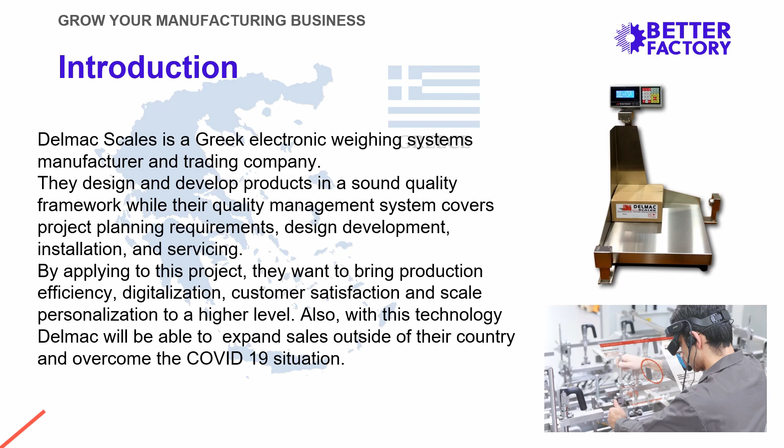By applying for this project, they want to bring production efficiency, digitalization, customer satisfaction and scale personalization to a higher level. The main ideas behind this project are customization, to automate and digitize the customization process of the scales.

Customization web tools with AR where customers can choose how they want their scales to be in advance. Lean production and voice control, to apply lean methodology.

This would include AGVs to transport scale parts and a voice control AI-based system that will guide employees through the production process. Maintenance, to use AR in order to provide immersive remote customer support. Waste reduction, to use 3D printed parts and recycled plastic from local waste.

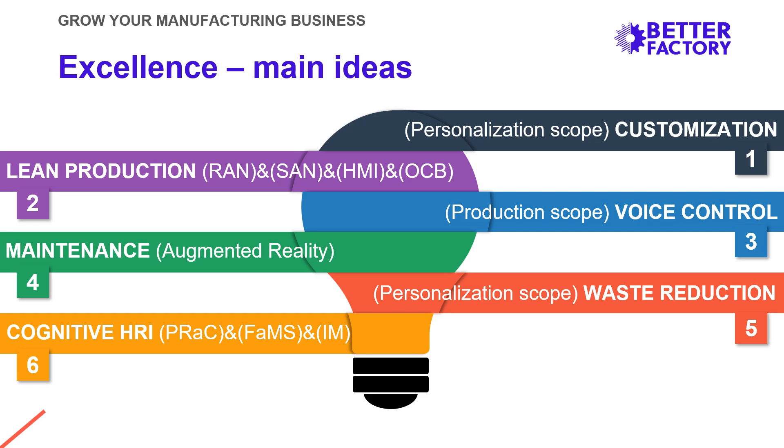Cognitive HRI, to improve the posture of production's employees.

Currently, each purchase at DELMAC starts with a negotiation with the customers to understand what their specific needs are. The customer needs are then presented to DELMAC technicians and together they work on the design of the weighing equipment to be manufactured.

Our first improvement will include an advanced web platform in which the customer can choose from different possibilities offered by DELMAC to customize the scale. This would result in a preview of their desired scale, which could as well be visualized in the customer's environment using augmented reality.

When the final weighing equipment's appearance and functionality are defined, we will implement lean, agile production methodology in order to create an optimal production process. However, the desire of agile production has led to the flexibility and complexity of production lines.

Agile manufacturing concept enables organizations to quickly react to diversified market changes and customer needs while minimizing the modification to the company's main structure. Agile manufacturing strongly depends on IT devices.

For creating a continuous flow of material, we will use AGVs that need to connect smoothly working positions by efficiently transferring material between them. For that movement, we will use SAN and RAN modules, and for visualization, OPIL HMI module.

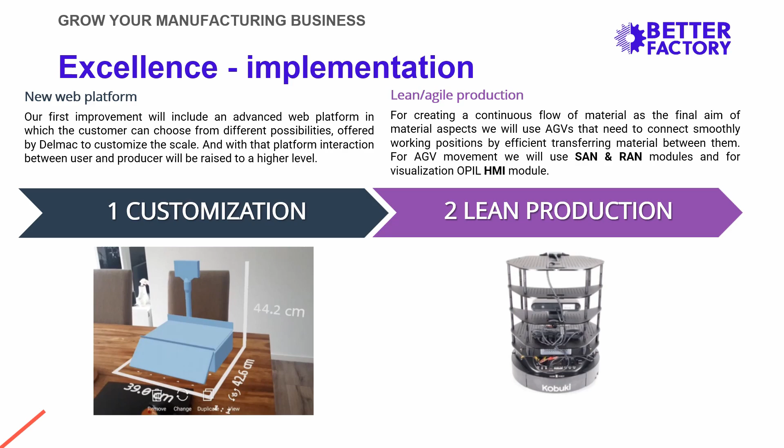The implementation and utilization of a pull mechanism will help prevent time being spent on overproduction. The 5S Lean tool, which stands for sort, straighten, shine, standardize and sustain, will enable removing of unnecessary steps and reducing equipment setup times in production processes.

Scale production will be done by specialized technicians with additional improvements like the application of voice control, AI-based solutions, and light ERP software. Each employee will have a headset that will guide him through the production process. This will create a fully planned production of scales.

During the project, the technology provider will continue to develop a voice control module which started with the L4MS project, that will be adapted to scale production processes, as well as the ERP that will be used for work order creation and execution monitoring. This AI-based voice control system will enable flexibility in working processes based on production customization requirements.

It will allow agile and much better control in production processes and high efficiency of employees. This module can be easily adapted to various other systems, especially warehousing, and by adding it to the better factory ecosystem, it will surely bring additional value to the project.

Final weighing equipment will be sent to the end customer. As already pointed out, production equipment is very advanced and must be integrated into the customer's production process. That is something DELMAC's technicians must do inside the customer's production facility. All installations and further maintenance require DELMAC's employees visiting the customer site.

A large improvement could be the application of AR technology. This technology could bring the following benefits: the customers can preview the scale in their environment before it is produced.

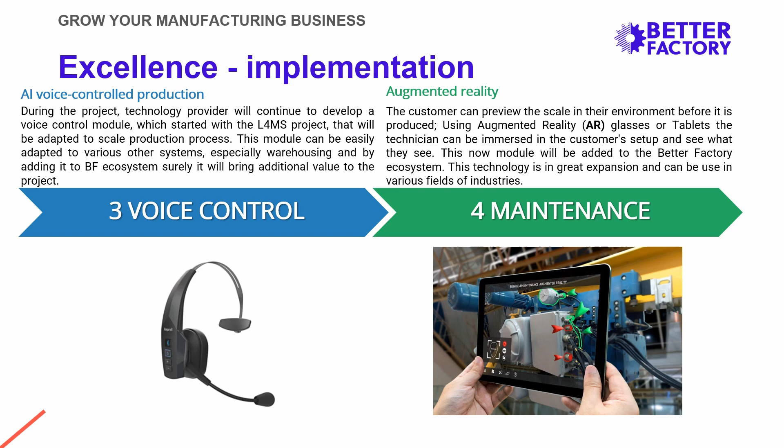Currently, DELMAC Scales produces all its products in its factory in Athens. This way, DELMAC not only ensures the quality of production and materials, but also generates as little waste as possible.

However, there is some plastic residue generated in the production that could be reused to make the body of simpler scale models. The artist will create a new design for a scale using production and a local plastic waste recycler to raise awareness about the amount of plastic that is discarded by local communities, and how it can still be valuable and should be reincorporated in the production chain.

Another improvement that will be implemented is the optimal employee ergonomic position. Because DELMAC produces different types of scales, the employee can be in different and hard positions. In order to determine his position, fatigue and movement, we will use RGB cameras and smart wristbands.

Output from those devices will be input to a pose recognition and correction and fatigue monitoring system that will give recommendations on how to improve employee conditions and get better performance. On the other side, their output will be input to an intervention manager who will give the best solution for the worker to interact with the workplace.

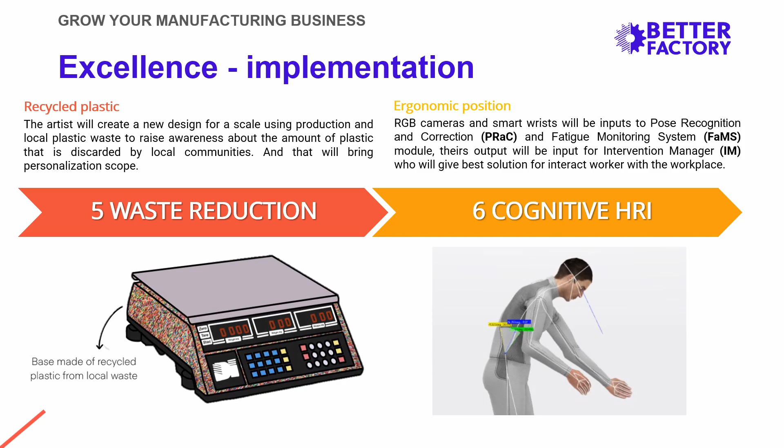The automation solution with great business potential concerns customer support and maintenance service. The sales network is reaching only Greece today, so all customer services are performed in person by a DELMAC representative. Immersive remote customer support will make international sales possible and customer support travel free.

Customer service, while not coming from production sales directly, represents a great share of DELMAC sales. Another valuable benefit of this solution is that it protects the business from unexpected risks like the corona pandemic, where this type of service had to stop due to travel restrictions.

Using advanced technologies through light ERP software and agile lean manufacturing will decrease production costs. The opportunity for ordering upgrade is presented through a customization web tool, and even visualization of the customized model in their own location using augmented reality.

In this way, there are significant time savings in the order-to-cash process, which is very significant for financial liquidity. The proposed solutions also increase employee productivity, plus they cut some expenses like travel, marketing material, paper, and other office materials.

Production scrap is essentially wasted money. Using 3D printed parts and recycled plastic from local waste is a clear cost-cutting methodology, opening personalization perspectives in production.

The idea is to improve the posture of the production worker, which is often improper due to different production stages and different types of scales. By measuring and analyzing the production worker's posture using RGB cameras and smart wrist devices, we will determine their position, fatigue, and movement, and provide recommendations for optimal ergonomic posture.

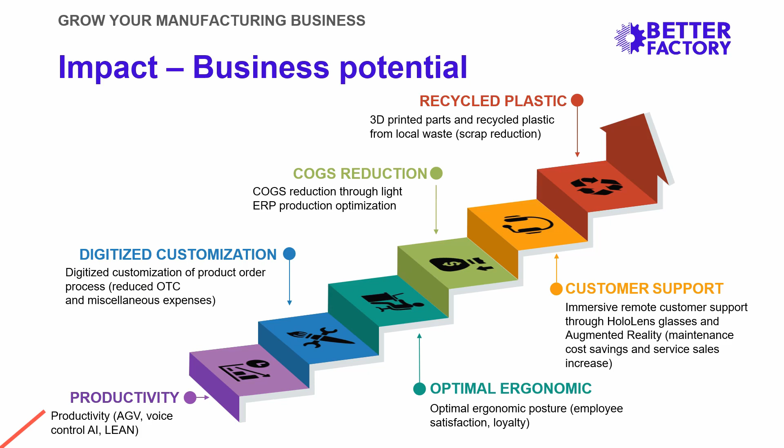There is a rising trend of customers worldwide who are comparing, evaluating, and making purchase decisions in relation to product sustainability and environmental friendliness. For DELMAC, this project and the use of the RAMP platform offers the ability to expand their customer base outside of Greece, as well as enhance their production using new technologies while providing online services to customers by AR and IoT that Better Factory provides.

Also, the use of AGVs and voice control systems will bring lean principles into the facility.

For Sara Alvarez, team artist, this project is a great way to explore the application of 3D modeling in augmented reality, creating immersive experiences. Besides, she's up to the challenge of rethinking how industrial scales could look and feel, since their design is usually quite neutral and functional.

Sara will use RAMP and Better Factory tools to grow as a design researcher and creative technologist, expanding her portfolio and practicing the application of sustainable design.

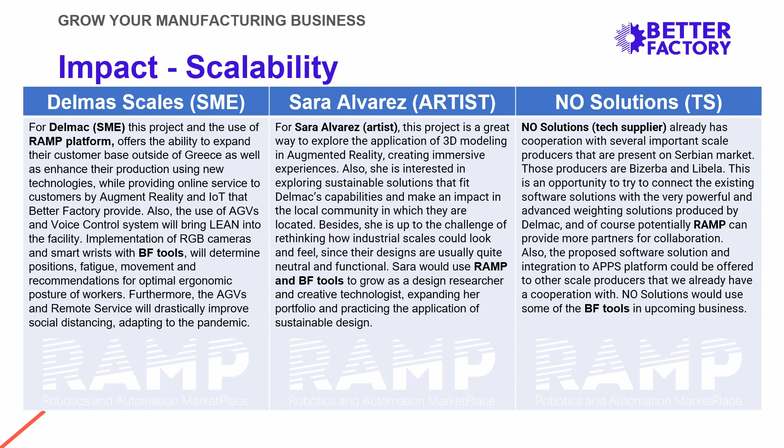NO Solutions, as a tech supplier, already has cooperation with several important scale producers present on the Serbian market, such as Bizerba and Libela. This is an opportunity for them to connect their existing software solution with the very powerful and advanced weighing solution produced by DELMAC, and of course RAMP will provide more partners for collaboration.

The experiment will have several impacts on sustainability of the project: reducing material waste with the factory digital twin simulation and digitalization of the customization phase, and ecology impact by using AR and remote maintenance, which will reduce the need for driving and CO2 emissions.

Work conditions will be improved from an ergonomic and safety point of view. There will be social and environmental impact by collaborating with the local plastic waste recycling community in Athens, and reduction of environmental impact by producing parts in-house.

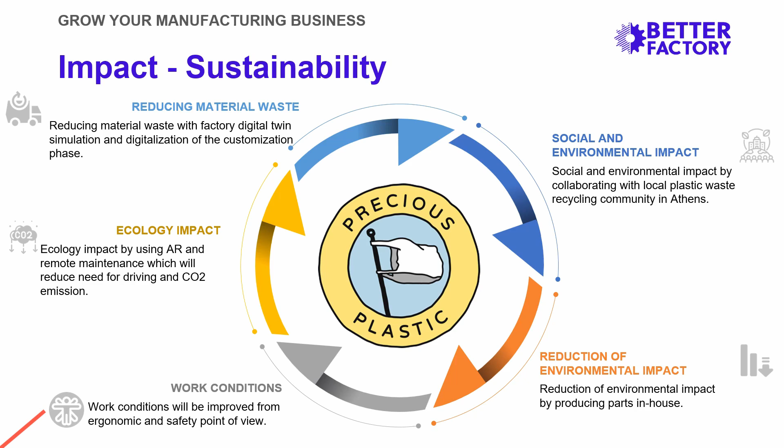Our experiment team consists of experienced professionals ready to work together on changing the business perspective of all 3 sites in the consortium. We have identified several risks that can affect our experiment.

The only risk with high possibility of being actualized is an unfortunate and unforeseen event such as the COVID-19 pandemic. If Greece locks down, we will have to find an appropriate substitute for laboratory testing and implementation until it becomes possible to set it up in production.

There are 2 risks with medium possibility of materialization: low performance of using RAMP and its application, which will be solved by regular meetings with Better Factory mentors and the supporting team, and preliminary analysis of current software compatibility and integration with different databases; and lack of space at the SME to include the proposed AGV solution production restructuring.

Maximum dimension for the AGV will be included as a requirement in this development or equipment procurement process. And the 3 risks with minimal chance of happening are non-performance of partners or delay in milestones and deliverables.

Risk mitigation involves monitoring the progress in all areas of the project and providing prompt feedback to the other partners in the consortium. Regular checks and meetings will be held to help ensure partners are clear on the progress, along with constant communication with Better Factory mentors.

Another risk is burdening the budget more than expected. The project team will implement control methods that can detect possible issues with the project budget concerning potential deviation in expenditure. For loss of key people or a partner leaving the project, partners' expectations will be continuously verified in order to ensure their commitment to the project.